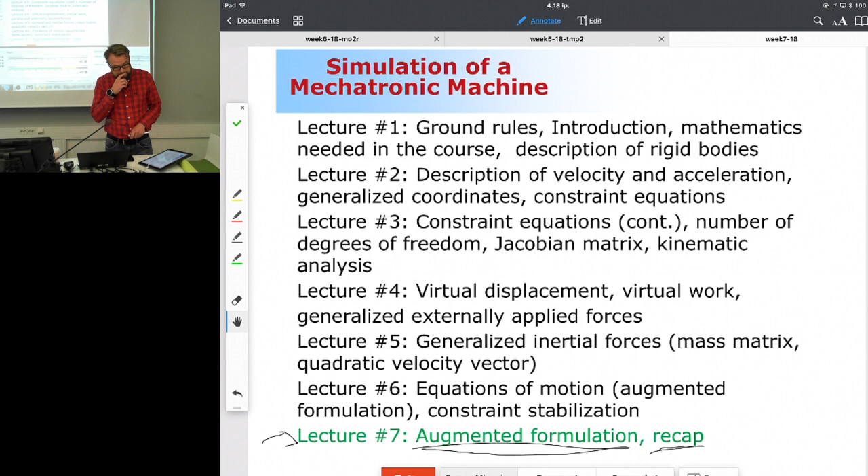Just shortly, it's going to be an online exam, but how is it that you can do the exam? I will get back to that a little later today. So augmented formulation, that's the first part of today's lecture, and what comes after that is summary. But now, before that, let's summarize what we discussed last week.

Remember, last week was the most painful week so far in your life. What we discussed was very theoretical, very hard to get a grip on, like what exactly is this concept of virtual work, and how you can apply that to inertial forces. Even more complicated, we discussed the augmented method, augmented formulation based on Lagrange multipliers. We concluded that it's part of the optimization problem, and this comes from pure mathematics. Today we will get back to that.

I want to have a good physical interpretation of the different components we need in an equation of motion. That's going to be something very, very important because I will ask something related to that in the exam. So what is the physical interpretation of, for example, the Lagrange multiplier? Based on today's lecture, you should be able to explain that to me.

Last week we looked at the generalized inertial forces. Generalized inertial forces, as the title implies, are the forces that are expressed using generalized coordinates, all right? Now if you look at the conventional way to express the inertial forces, it is mass multiplied by acceleration.

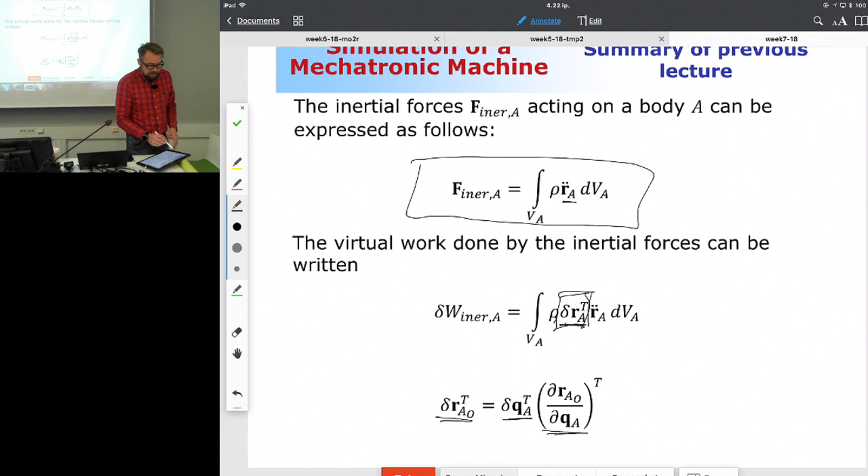Now what is actually relating those two matters together is the mapping matrix, which is partial R, partial Q -- partial R of any particular particle in the body with respect to partial Q. And Q is the generalized coordinates. Now that's the concept behind it, that's the big picture.

Now what we then did, we substituted the description of acceleration into that equation, and we also substituted the mapping matrix as written here. So the mapping matrix consists of 2 rows and 3 columns -- rows associated to global coordinates, columns associated to generalized coordinates. We substituted all that into the description of generalized inertial forces, and it's a big mathematical mess.

But that's all right, because we are allowed to use symbolic math tools, and with help of symbolic math tools, we can finally express the generalized inertial forces as shown here.

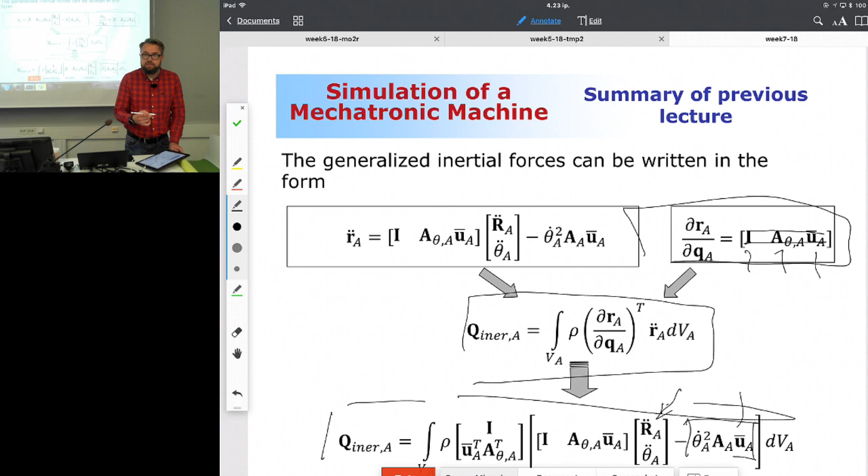What is it that we're going to have in this equation? There will be something called the mass matrix, which will be linearly related to accelerations -- this is the acceleration of generalized coordinates. Then there's another component that will be quadratically related to velocities, that's this component. So there is a mass term and then a quadratic velocity term. That's what we studied last week.

And the mass matrix in detail looks like shown here. It's a matrix that consists of 3 rows and 3 columns, because each one of the rows and columns is associated to generalized coordinates -- that's how we wanted to express our inertial forces.

How is the mass matrix structured? It consists of a submatrix located in the upper left corner -- let me go back here. So the upper left corner of the mass matrix is a 2 by 2 diagonal matrix, and when you look at the diagonal components, it's the mass of the body.

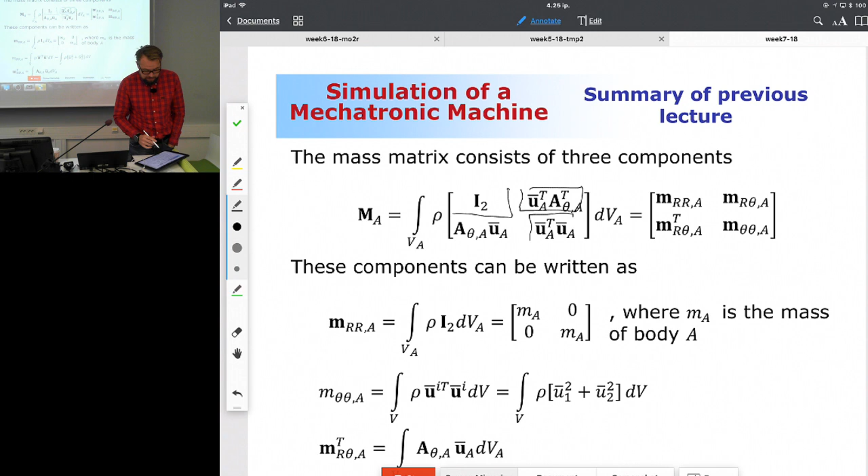Then in the lower right corner we have a scalar component that is the mass moment of inertia, associated to the generalized coordinate theta, rotation. It tells how the mass inertia resists rotational motion, and it depends on where the body reference coordinate is located. Then we have one more component that couples translation and rotation -- this is a component I don't have a clear physical interpretation for. That component will be equal to 0 if the body reference coordinate system is located at the center of mass. Okay, so that's how the mass matrix looks.

And then we looked at something that is quite difficult to understand. My recommendation regarding this is: don't get confused about the mathematical details, just simply look at the big picture here. Now let me explain you the big picture.

We concluded that when you use the concept of virtual work in such a way that the virtual work is imposed on all the generalized coordinates, when you have a constrained system, which is a multi-body system, because in the multi-body system we have constraints, you cannot set this equation equal to 0. You cannot do that because you are not accounting for the constraints. Generally speaking, there are two approaches to account for the constraints.

You can either substitute your constraint into this equation, so you can do the substitution procedure, that's one way. We are not going to look at that today. Then there's an alternative where you're adding the constraints to your original equation, and that adding will be carried out with the help of Lagrange multipliers. That's exactly what we're going to discuss today.

This equation basically says external applied forces, which is F, is equal to mass multiplied by acceleration. That's what it is. But this only holds, it's only valid for an unconstrained system. And in a multi-body system, we always have constraints.

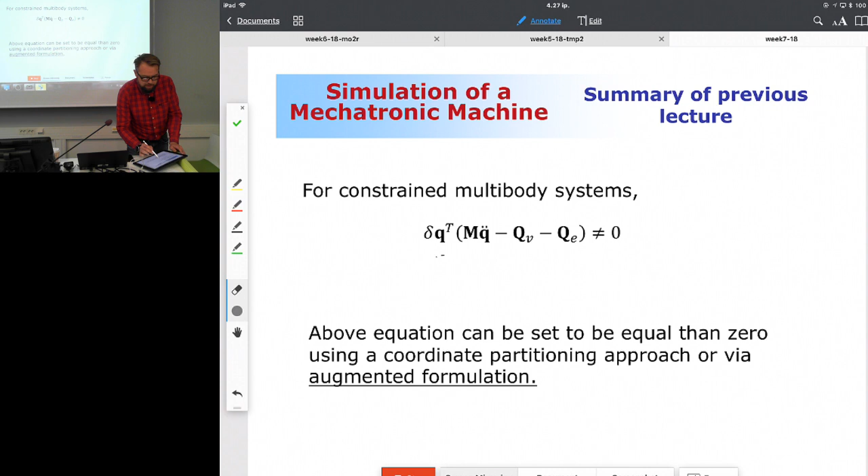Hold on, so I will erase this. So this is my original equation. And now I'm going to add something to this equation. What I'm adding is this guy here, which is a Jacobian matrix multiplied by Lagrange multipliers.

What is this? In pure mathematics, we learn that Lagrange multipliers are the price you have to pay because of the constraints. What does it mean for us, people from mechanical engineering? What are the constraints? Joints. Those are the joints. So what's the price? Reaction forces. Reaction force is due to the constraints, that's the price we have to pay.

So where are the reaction forces here? They are actually the Lagrange multipliers. Those are the reaction forces, and if you look at the magnitudes, numerical values of Lagrange multipliers, those are exactly the same as the reaction forces. When you look at the Jacobian matrix, this guy here, it tells where the forces are located in our system. So that's what it is. Jacobian matrix multiplied by Lagrange multipliers gives us the reaction forces. The numerical value for reaction forces is lambda, and we have an equal number of lambdas in our system as the number of constraint equations.

Example: we have here a pendulum. In a pendulum we have one beam-like body that is constrained to ground with the help of a revolute joint. How many constraints do we have in this system?

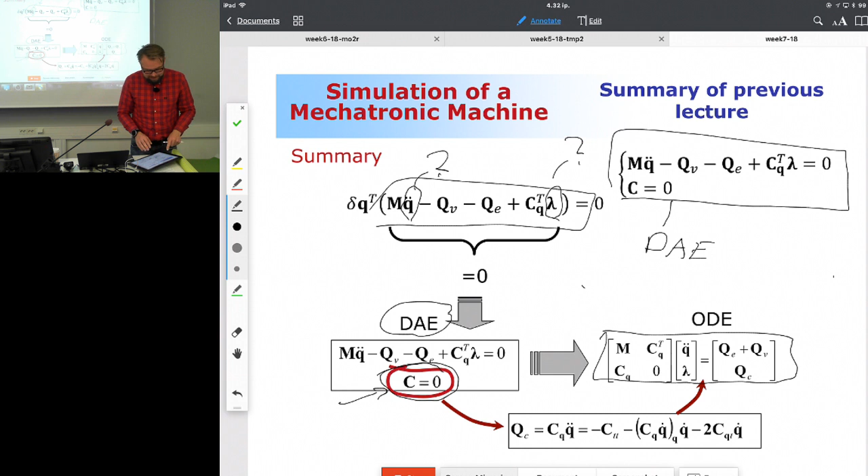How is it we can make that happen? Well, we can take this constraint equation here, and we can differentiate that twice with respect to time. Once we do that, then we have this form here. That's what we are after. So that's the equation of motion, and that we can create for any mechanical system we want. Well, at least the ones we are studying as an example, and many others can be. You can use this equation and apply it to solve the dynamic responses.

Okay, here's the big picture. I have here the mass matrix. You know what that is - that's the system mass matrix, and it depends on the number of bodies. Then I have here the Jacobian matrix, which you are already familiar with. You can get the Jacobian matrix by first making a list of constraint equations, and then differentiating the constraint equations with respect to generalized coordinates. Then I have here the Jacobian matrix with the transpose operation. No surprises here - zero matrix just to match the dimension.

Then I have here a vector of unknowns. Listen to me - this is a vector of unknowns. That's what we're going to solve. So what is it we solve? We're solving first the acceleration and the Lagrange multipliers that are reaction forces.

Here we can integrate the velocity of generalized coordinates with help of an integration procedure. From here we can integrate position, and then we're done. And then we can increase the time, and we can redo the whole thing. That's what the dynamic solution, or integrating this forward in time, that's what it is.

Okay, let me emphasize the unknowns. Unknowns are the Lagrange multipliers, this guy, and the generalized coordinates. Unknowns are generalized coordinates and Lagrange multipliers. You got it? Unknowns in this case are this vector, which is generalized coordinates and Lagrange multipliers. Okay, clear. All right, then I have here the vector of externally applied forces, the quadratic velocity vector, which may be equal to zero depending on where you put your body reference coordinate system, and then the one that comes when you differentiate your constraint equation twice with respect to time.

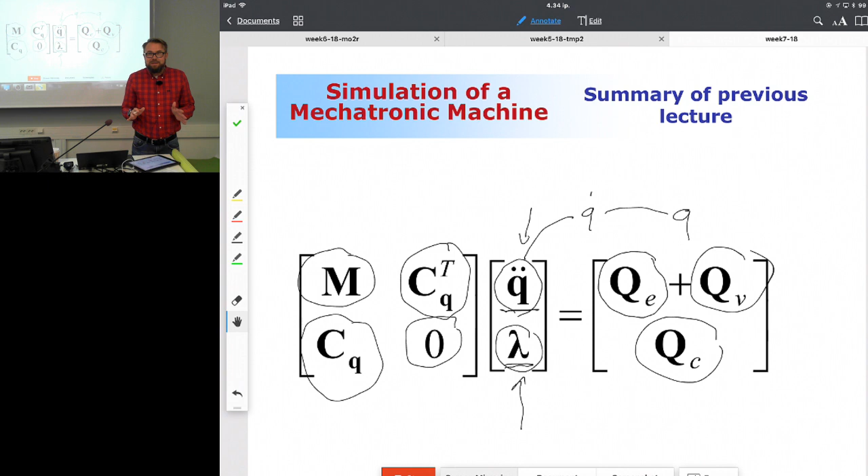Ready for in-class quiz? Yeah. Any guesses what it is I'm going to ask? In augmented formulation, unknowns are...

Here it is. Here's my first example. I will get back to this in-class quiz and the solutions soon, but first I would like to explain my first example to you. So in my first example, I have a planar system, and I must admit that the drawing is a little bit confusing. But what I would like to show here is that there is one moving body only, and the one moving body is this beam-like body, this one here. That's my moving body.

The moving body is constrained to ground in two different locations. So it's constrained to ground at point P, located here, with help of a primitive joint. This primitive joint constrains the motion in the global x direction, and this is a motion that is not possible - that's the motion that is constrained. So it's a primitive joint. Maybe better to change the color. So this red arrow shows that it's not allowed to move in that direction.

Then there's another primitive joint located at position Q, this position here. And in this one, the motion in the global y direction is constrained. So that's the constraint. So those are the two constraints.

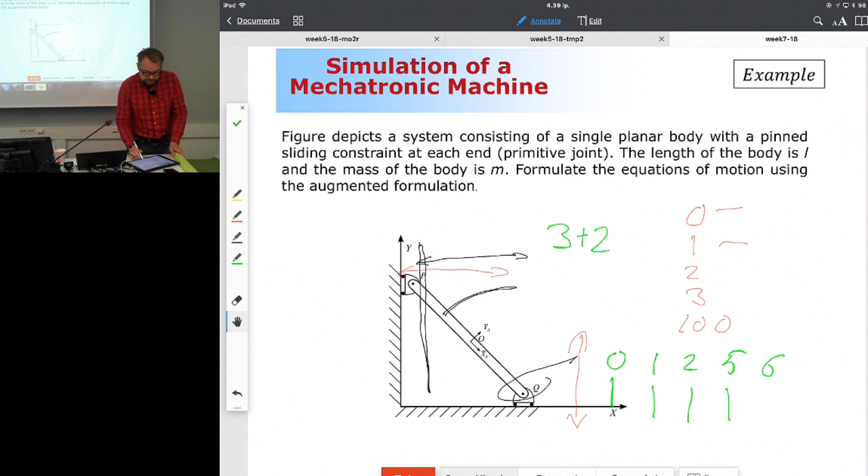Okay, let's solve the whole thing. So let's make it happen. We're going to follow certain steps, and once following those steps, we can get the equation of motion automatically.

The worst mistake you can do in multi-body dynamics is thinking. Absolutely no thinking. Thinking is not allowed here. You're just following certain steps. Always the certain steps, and always, always, always you must follow this equation. No shortcuts. Shortcut is a criminal action. Not allowed. You're just following the steps and you get out everything automatically.

Okay, so let's follow the steps. Step number 1, mass matrix. We could do it in a hard way as shown here, and the hard way is that we will use this volume integral to define the components needed in the mass matrix.

The first component is a 2x2 matrix where there is a mass of the body. No need to do any volume integrals, it's simply a mass of the body. Then the second one, which is a mass moment of inertia. So if I assume that this is a beam-like body, a thin body, I can assume that this body's y direction is equal to 0.

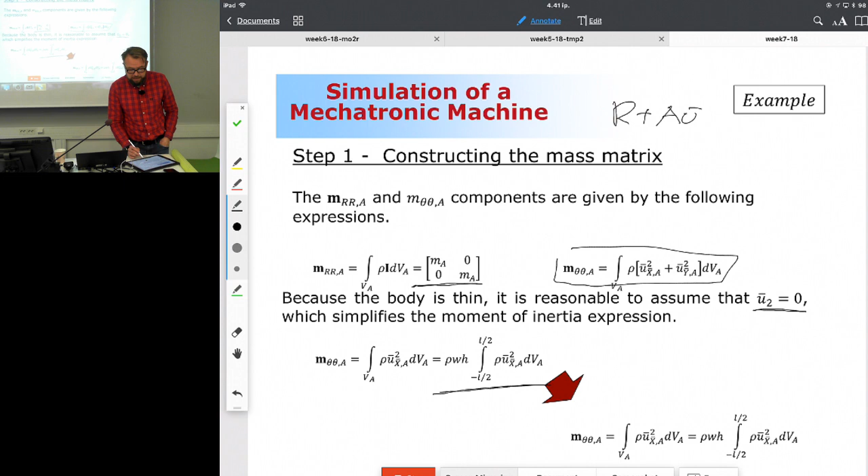Then I can express it such that I simply integrate u bar x to the power of 2, and I'm going to integrate that in the x direction. So that's basically the mathematical operation I need to carry out. But again, just use the mathematical tools. Once I do this computation, I will get mass times length squared divided by 12. This is what we got last week too.

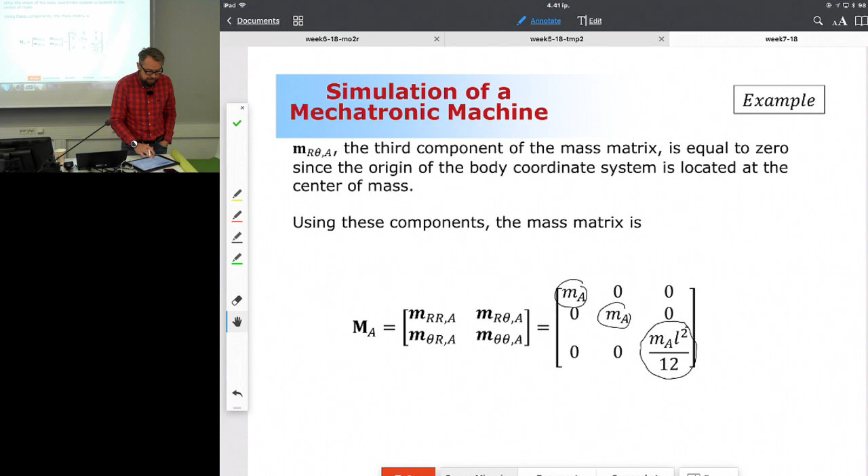So, I'm going to get the diagonal representation of the mass matrix. Why is that? Simply because if I look at this picture again, look at where the body reference coordinate system is located. Based on this location, I could tell that the mass matrix will be a diagonal mass matrix. Okay, step number 1, done.

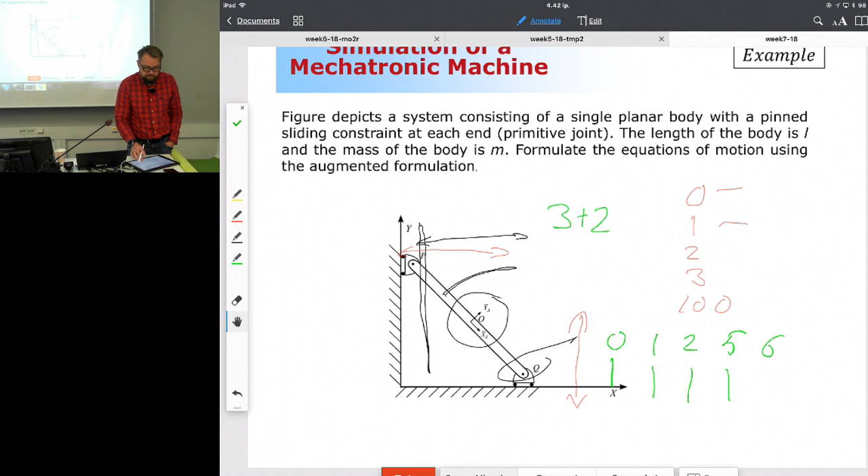Step number 2, Jacobian matrix. What are the ingredients we need in the Jacobian matrix? We need constraints, and we need generalized coordinates. So the constraints are associated to 2 points, point P, which is here, and point Q, which is here.

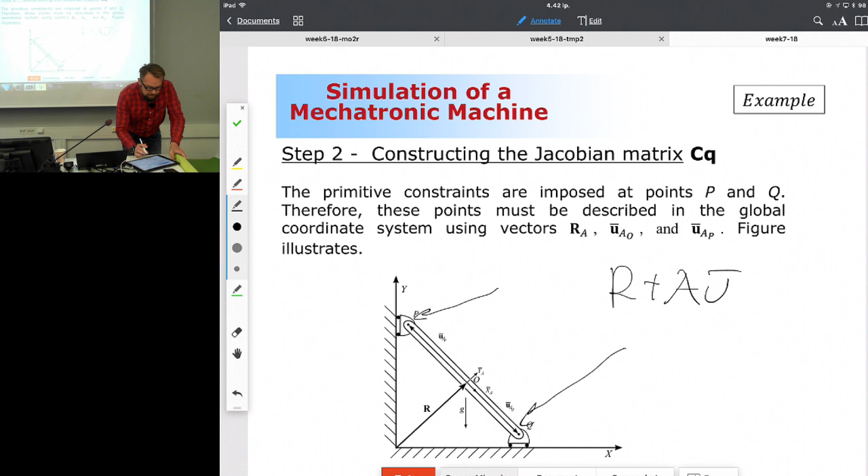Let's express these locations with help of this equation that we are quite familiar with, and then once we have this equation, we're ready to impose the constraints. Okay, clear? So let me see what is the first point. First point is P, the one that is located here. So this is P point.

First, we have to travel from the origin of the global coordinate system to the body reference coordinate system. That will be carried out by vector R, which consists of 2 components that are unknowns. I don't know what they are. Then I have to account for the orientation of the body reference coordinate system. Orientation is an unknown, I don't know what the angle theta is, but I will solve it.

And then I'm going to use the vector u bar to travel from here to my final destination point P. The vector u bar, when you look closely, the x is pointing this direction, so I must travel minus L divided by 2 in the x direction, and y direction is going to be 0.

And then I'm ready to impose the constraint associated to this component, because the motion in the global x direction is not allowed. That must be equal to 0 all the time. So here's my first constraint. You following me? Yes? Everyone? Okay, good, so we're on the same page.

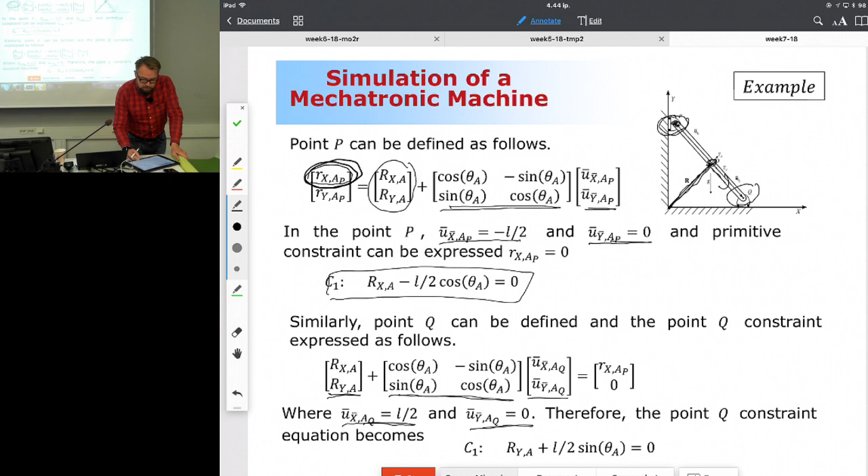Okay, then we're going to move on to point Q. Exactly the same business, but now we're going to first move the body reference coordinate system to account for the orientation. Now the vector u bar will be different because we're in the other end of the beam-like body. Vector u bar is going to be L divided by 2 because we have to travel in the positive direction, and y will be equal to 0 as in the previous case. Now we're ready to impose the constraint. This time the constraint will be associated to the y direction. That's it, I got the second constraint as shown here.

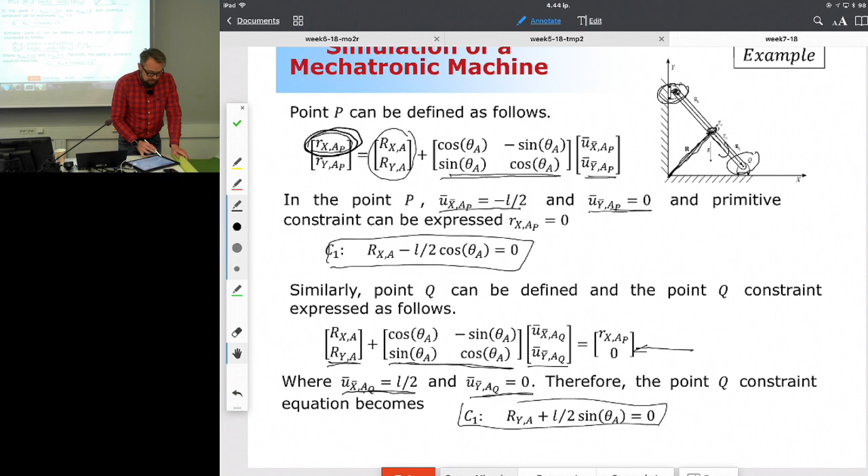Then I have the ingredients I needed to compute the Jacobian matrix. So the list of generalized coordinates is Rx, Ry, and angle theta. And then it's just mechanical mathematics.

I will take the constraint equations one at a time, and I will differentiate those with respect to the generalized coordinates. That's going to give me the Jacobian matrix. The Jacobian matrix consists of 2 rows, 3 columns. Columns are associated to generalized coordinates, rows are associated to constraints. Clear?

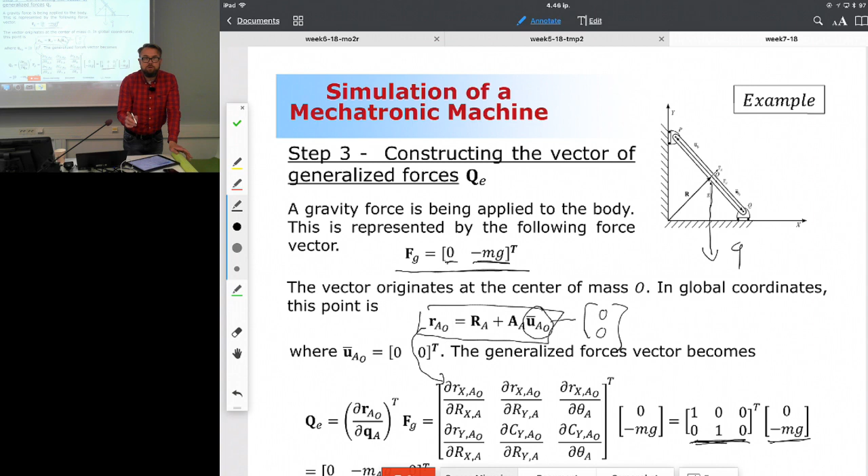So my mapping matrix turns out to be the one shown here. I'm basically taking this position and differentiating it with respect to my generalized coordinates, and then I get the mapping matrix. Mapping matrix multiplied by forces in global coordinates gives me the generalized forces. Here's the final solution: it consists of 3 components - 0, mass multiplied by gravity constant in the minus direction, and 0. Okay, step number 3, done.

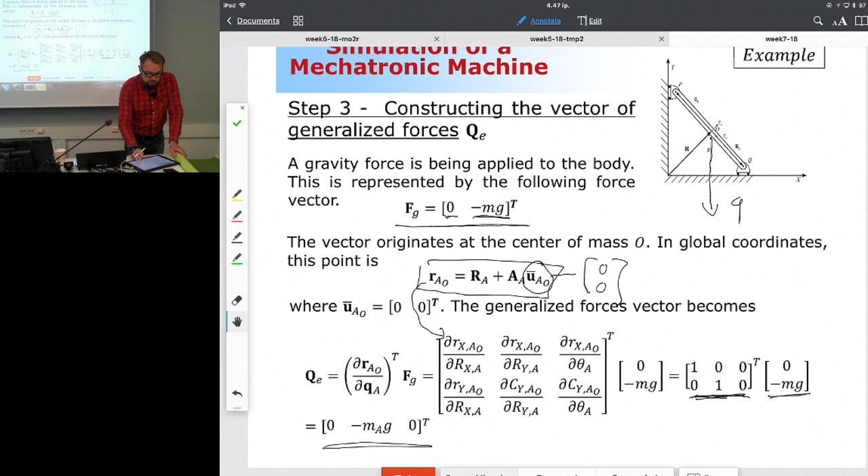Quadratic velocity vector - I'm not even going to compute that, because I can see from the mass matrix, which was a diagonal matrix, that this will be equal to 0. Step number 4, checked, so tick the box.

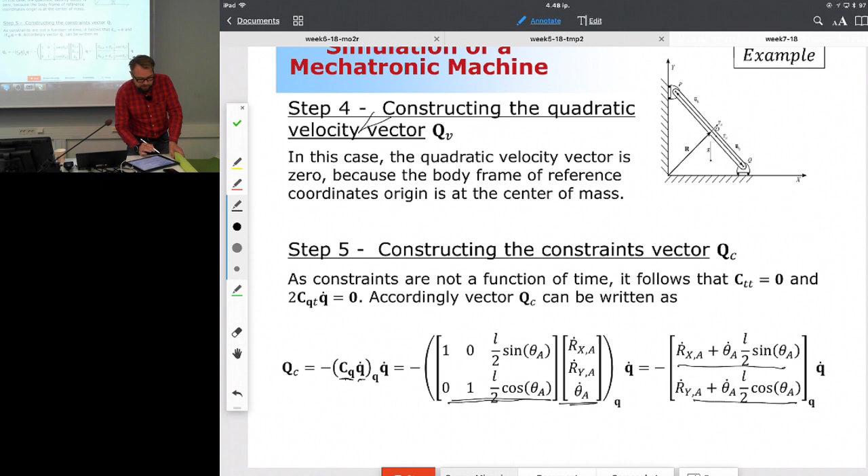Checked. Step number 5, QC, which is what I get when I differentiate the constraint twice with respect to time. This is a little painful because it's the same thing we looked at when we computed the kinematics. So first here's the Jacobian matrix multiplied by the velocity of generalized coordinates. Here's my Jacobian matrix, here's my velocity. That gives me a vector of 2 components, this and this. Those components will be differentiated with respect to generalized coordinates, which gives me a matrix - and the matrix, where is it?

This is my matrix now, so I copy-paste quite a bit of material from the previous page. So this is my matrix, and then this is finally multiplied by the velocity of generalized coordinates. No thinking needed. It sounds a little cumbersome and difficult, but it's very straightforward. Okay, step number 5, done.

Step number 6, this.

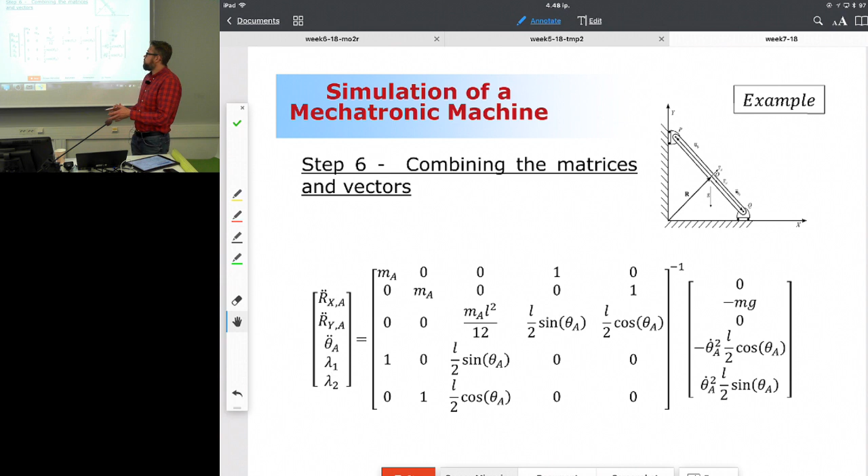Constructing the system matrix. This is my system matrix. When you look at this closely, I have here the mass matrix of the system. So a system consists of one body, so it's just one mass matrix. Then I have my Jacobian matrix here, and the transpose of the Jacobian matrix is here. And all these will be inverted.

That's fine because I have computers that can do the inverting for me. Then I have this 2 by 2 zero matrix here. Here's my externally applied forces plus quadratic velocity vector, which was equal to 0. And then the QC component is here. That's it. My unknowns are listed here: the acceleration of generalized coordinates and Lagrange multipliers. So I'm solving not just the response, but the reaction forces too.

Okay, let's make it happen. So, are you ready to solve this in MATLAB?

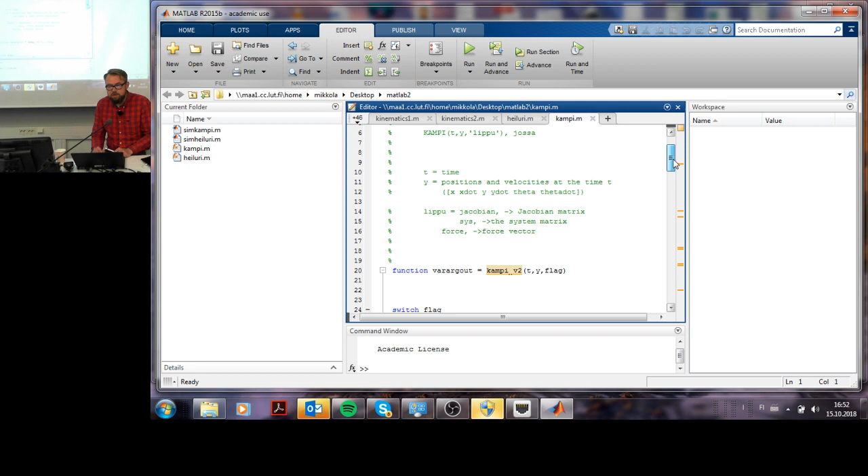Okay, so here it is. So I have a few variables: time, and then the vector that tells how my positions and velocities are - x dot, y dot, theta dot. So those are the generalized coordinates and their velocities. And then a little bit about how my integration is described. If I look at this, this is the one where most of the material can be found, in this code or this file here.

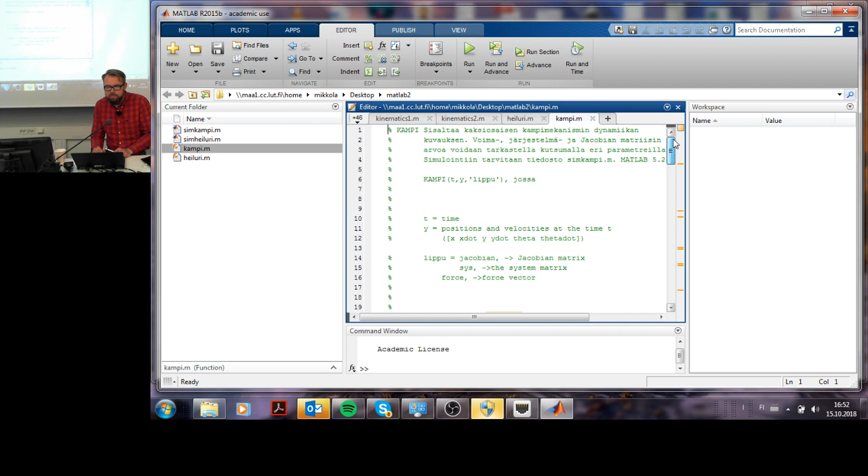Where is it now? Let me see. So here's my unknowns, here's my Jacobian matrix. I'm using the vector y to express my unknowns, shown here. And this is my forces here. My system matrix is this one here. Everything there, we can look at the details a little later. But this is it.

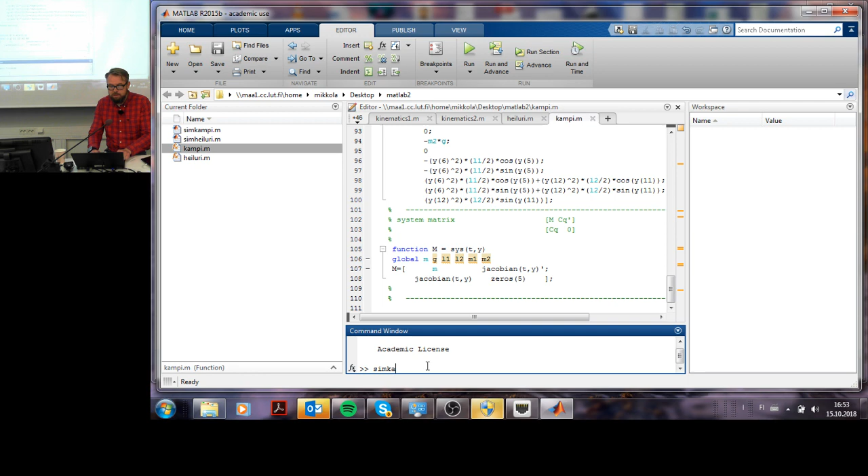Oh no, let's see, you ready? Hold your breath. Okay, ready? Oh wrong, this is not the right kind of model. I need to go back, this is way too complicated for us.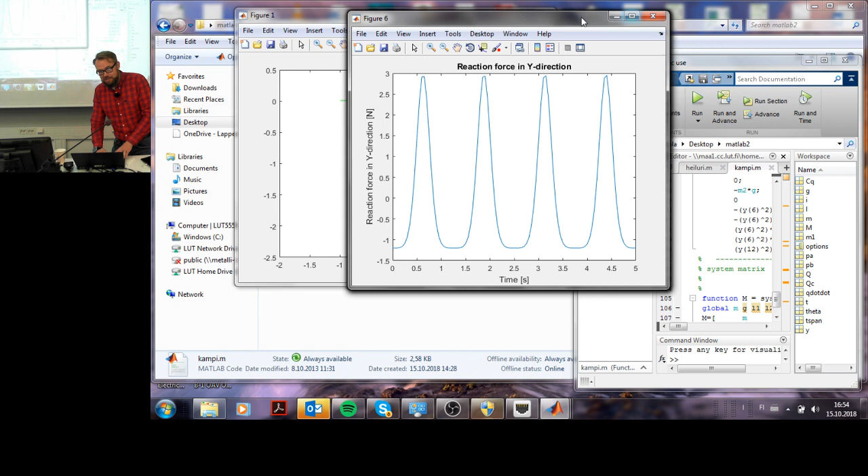So great stuff. So here are the coordinates when I'm solving them, but the response, you saw that.

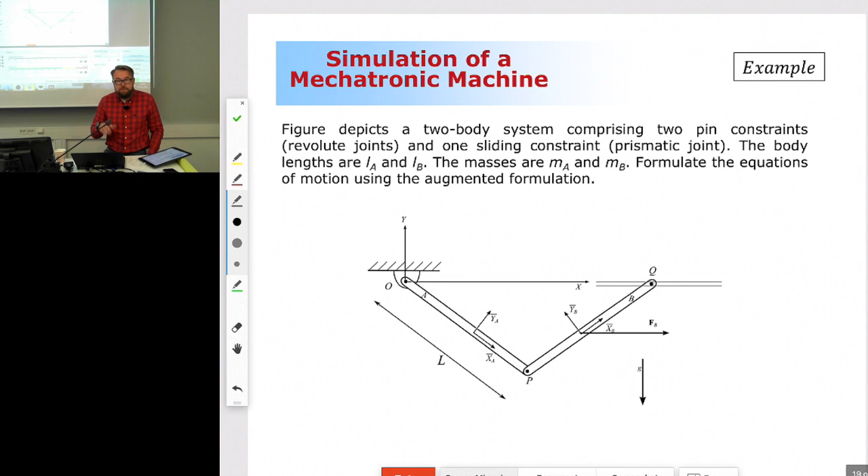We have a deal. Okay, my next problem is this one. So it's not just one moving body, but two. Let's raise the level of difficulty. So now we have two bodies. How is this going to be different comparing to the previous example? No difference. And that's the beauty of multi-body system dynamics. We're going to simply follow again these 6 steps.

We're going to follow the 6 steps and get the equation of motion automatically. Nothing we need to think about, it's very mechanical work. First we express the mass matrix, then the constraints Jacobian matrix. That's how it goes, so there will be no surprises. This is just an extension to 2 bodies. If you extend this to 100 bodies, it will be all the same again, no changes. I have here a system that consists of 2 moving bodies.

So what's going to be the number of generalized coordinates? 6. Okay, 6 generalized coordinates. What's going to be the number of degrees of freedom? 1, because of this equation. Okay, what's going to be the number of unknowns?

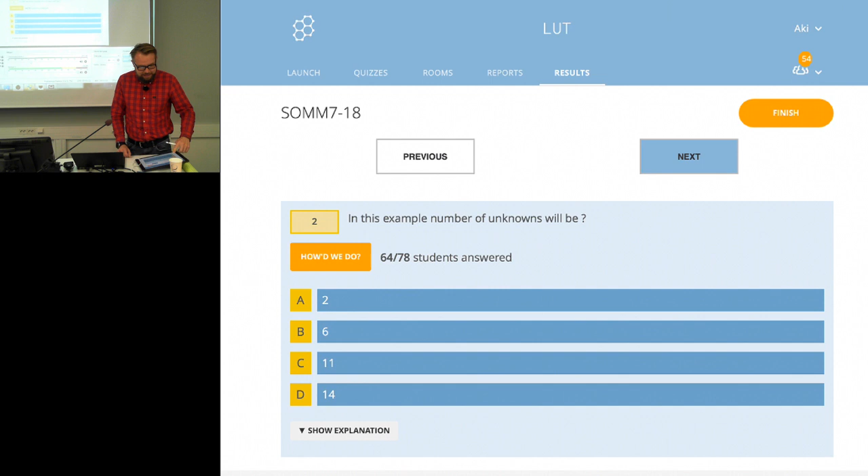Okay, but now we have 64 students, and the correct answer is 11. Okay, still, if you round it up, it's 100%. So where is the 11 coming from? Where is this coming from? 6 plus 5.

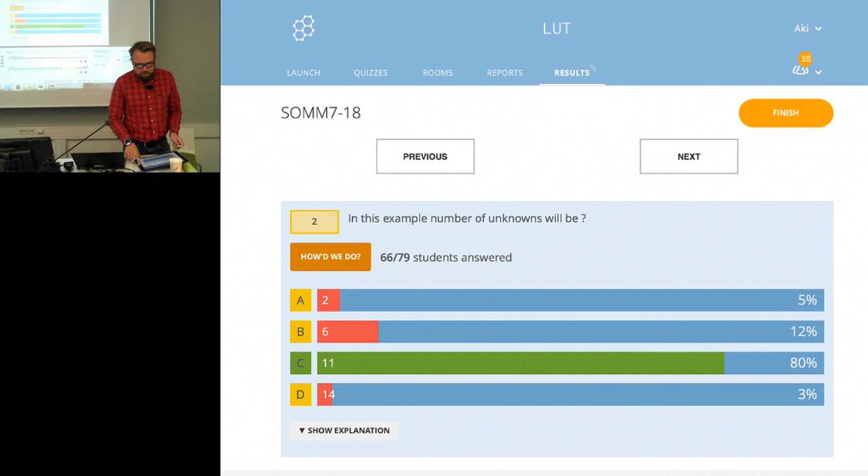6 plus 5, because if we go back to this one here, remember what I have here. These are the numbers you need in order to compute the degrees of freedom. But you can use these numbers for another purpose too, to calculate the number of unknowns by this operation: plus 6 plus 5, 11. That's how it goes, so that's the number I'm looking for here.

What are these 11? Yeah, so they are generalized coordinates, 6 generalized coordinates plus reaction forces. Reaction forces are the ones located here and here, and then here too, so here's one. So there is a total of 5 reaction forces because of the 5 constraint equations.

Okay, with that, I guess we're ready to move on and follow the 6 steps to create the equation of motion. At this time I'm not going to show off with any mathematical details, but instead I'm going to simply use pre-calculated tables, and this, by the way, is my recommendation. So if you need to compute the mass matrix for a system like this, I don't think it makes much sense to use volume integrals.

Instead, take the pre-calculated engineering tables. A lot of these tables are available, and with the help of these tables, you can compute the mass moment of inertia and other features. Here we're mainly looking for mass moment of inertia, because in our diagonal representation, we're going to have just the mass of the bodies and then the mass moment of inertia.

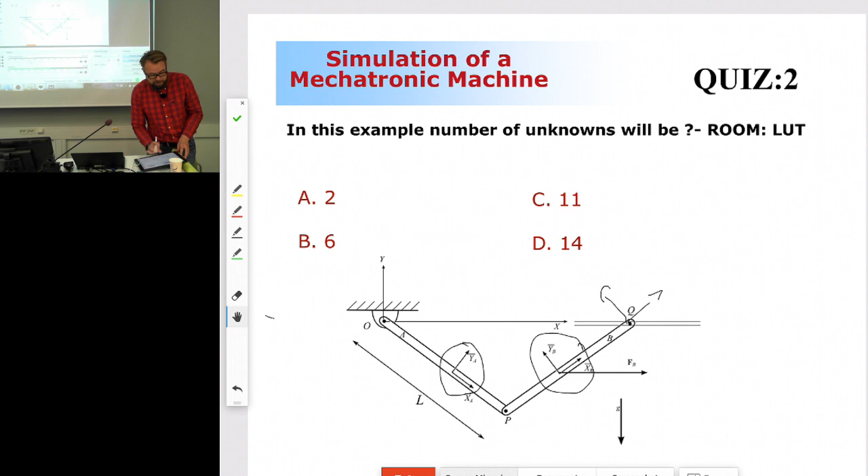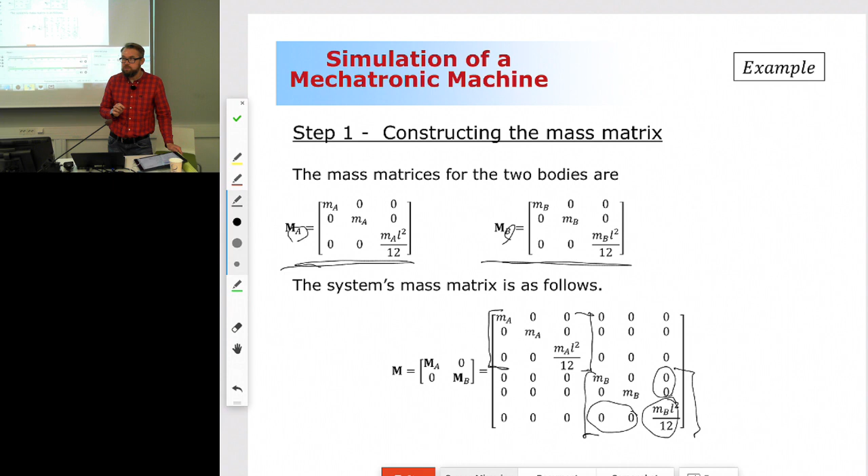What if I would change the position of this second body reference coordinate system to be, say, here, at one end of the system? Why not? I could make it happen. But in that particular scenario, these two components would not be equal to 0, and it would also affect this term here. So those will be the changes because of modifying the position of the body reference coordinate system.

That's step number 1, done. Step number 2, Jacobian matrix. Ingredients again - we need constraint equations and we need generalized coordinates.

First constraint equation is associated to point O, which is this one here. Now here we have a temptation - we have the global coordinate system, and this is exactly where the constraint is imposed, at the origin of the global coordinate system. Can we make a shortcut, not to use this equation but instead jump directly to this location? No, absolutely no, not allowed.

We always have to follow this equation, meaning we first travel here with help of R. We account for the orientation of the body reference coordinate system with help of the rotation matrix, and then we come back to where we started with help of vector U bar. That's the procedure we always follow. So that's the translation. Vector U bar will be minus L divided by 2, 0, because the x-axis is pointing this direction. This gives, and then this will be equal to 0, because this point here with respect to the global coordinate system is at the origin. So that's where I get two constraint equations, C1 and C2.

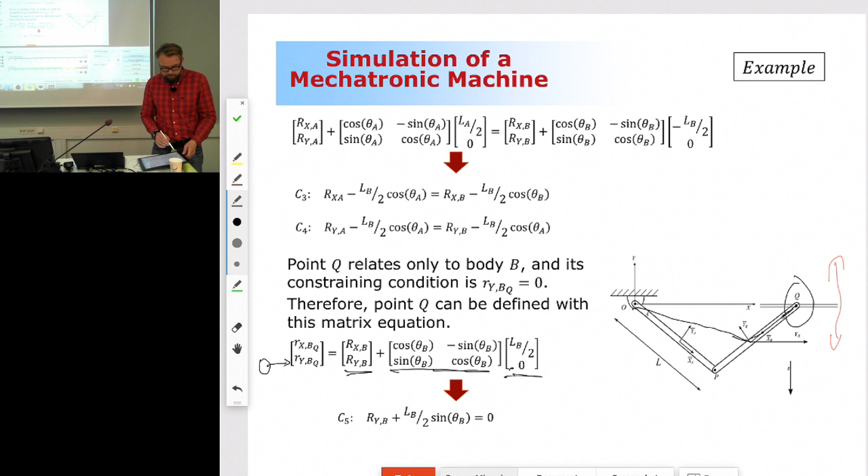Okay, one more step before we are ready to express the Jacobian matrix. We have to make a list of generalized coordinates. Let me point it out: this is my first generalized coordinate, my second, my third, my fourth, my fifth, my sixth.

Those are the generalized coordinates. I'm going to simply differentiate these 5 constraint equations with respect to the generalized coordinates. I will get a matrix that consists of 5 rows because of the 5 constraint equations, and 6 columns because of the 6 generalized coordinates.

Very easy. Then vector of external applied forces. In this case I only have gravity force applying, and it's applying to both bodies, so it's going to be applying at the center of mass. Because the body reference coordinate systems are located at the center of mass, this will be somewhat straightforward.

This is the position where the force is applying with respect to body A. The vector U bar will be 0, 0 - it only gives this component when I look at the position. When I differentiate that with respect to generalized coordinates, my mapping matrix will be the one shown here. When I compute the mapping multiplied by the original force, which is 0, minus mass multiplied by gravity constant, this is the force associated with body A.

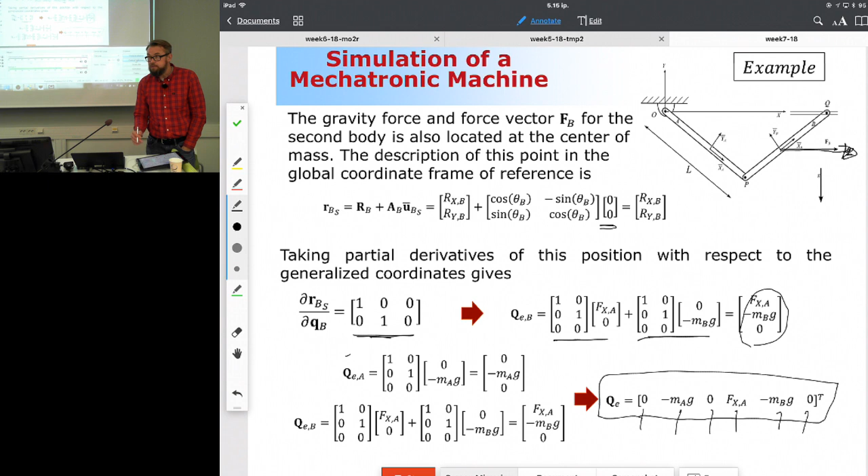This is associated with the point force, and this is associated with gravity. So the generalized force associated with body B is the one shown here. The final vector of generalized forces is the one shown here. It consists of 6 components because of the 6 generalized coordinates: Rx for the first body, Ry for the first body, theta for the first body, Rx for the second body, Ry for the second body, theta for the second body.

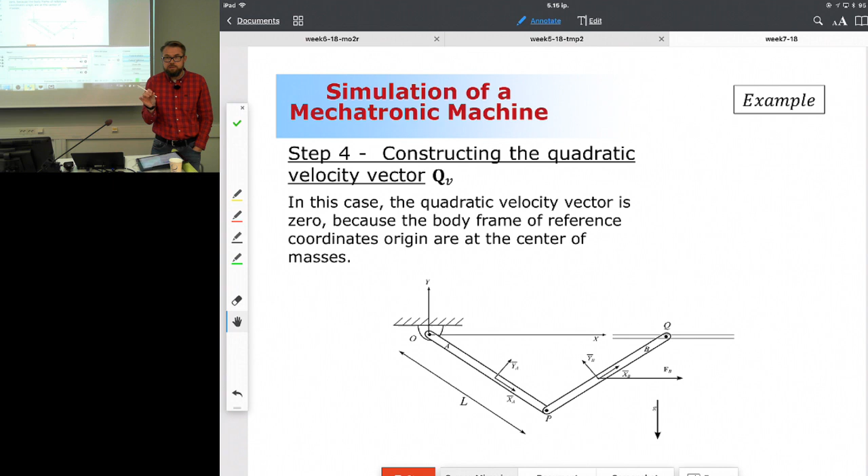Quadratic velocity vector - that will be equal to 0 because we have a diagonal representation of the mass matrices, so no need to worry about that.

Step number 5, the painful one, really the ugly one. Let's make it happen. This is the part we have to compute: here's our Jacobian matrix multiplied by velocity, that is then differentiated with respect to generalized coordinates, and finally that is multiplied by velocities again. Here's my Jacobian matrix - I'm going to multiply that with velocities. This is what I'm going to get.

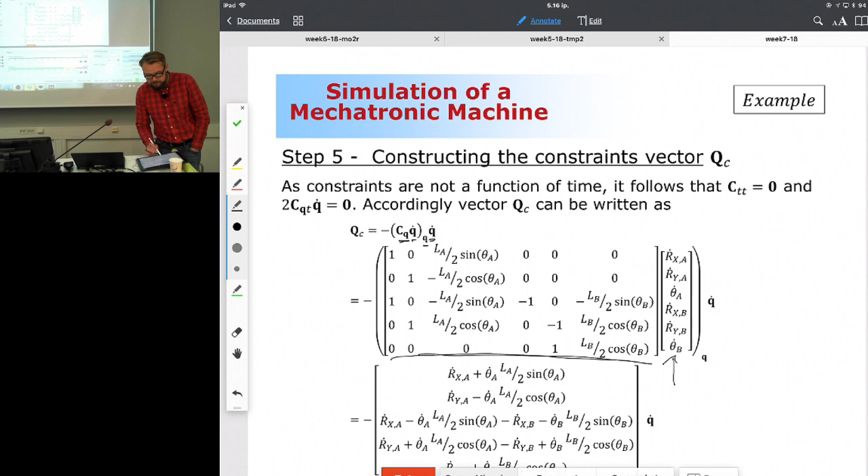It's a vector that consists of 5 components, as shown here, that I will then differentiate with respect to generalized coordinates. I will get the matrix as shown here, and that will be finally multiplied by velocities, and the final solution is a vector of 5 components.

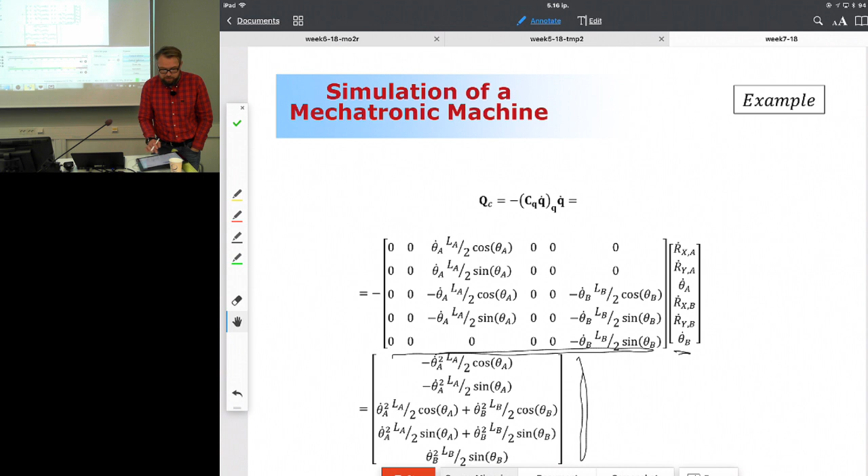The system matrix - I'm not even constructing that, but I can construct it using MATLAB. Should we run the MATLAB example? You saw the MATLAB example again - it's the one where this crankshaft mechanism is moving left and right. Let me show that to you.

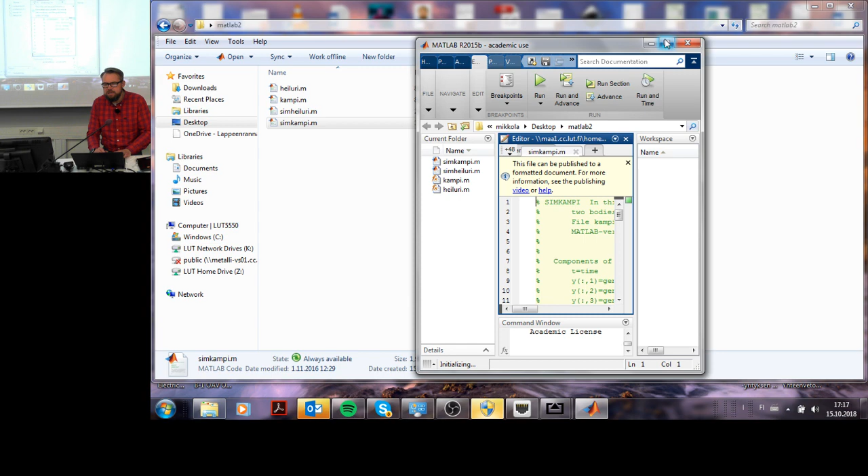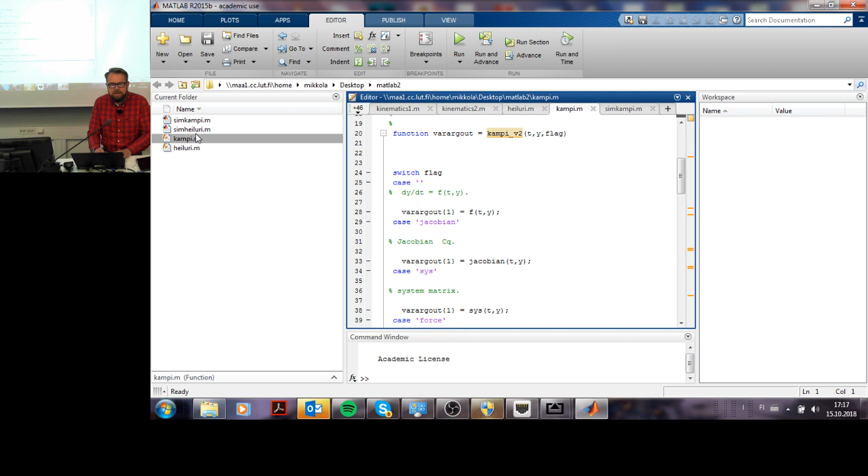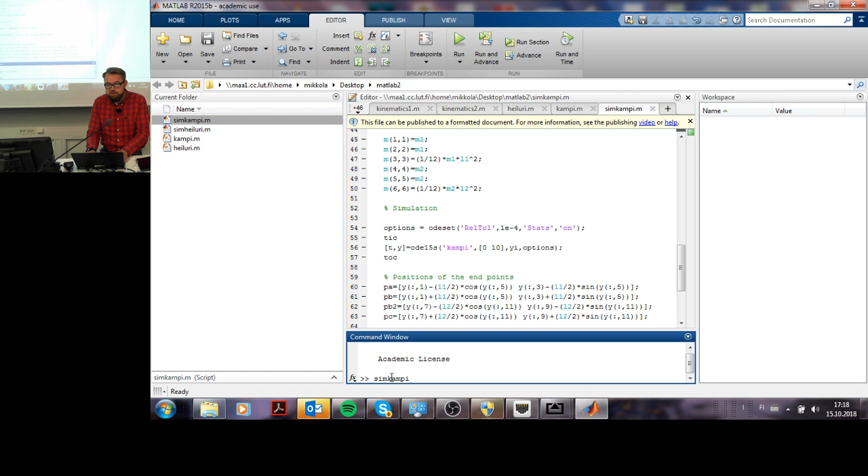So these are my coordinates here. I don't want to show that, but this one here - so these are my coordinates. This file will be available in the Moodle database, so with the help of the Moodle database you can take a look at how the code is. It's not professional code or anything, but let's just solve the response.

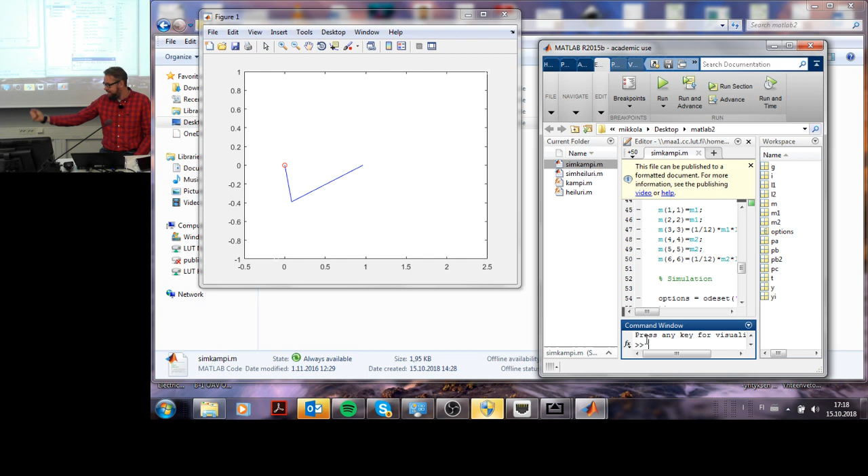Yes. Can you believe it? Can you even believe this? Magic, I guess that is magic. Oh yeah, it's like... Okay, now very good, so that's the second example.

Now I need to go back to OBS and change my settings again. Okay, so we're back here. By the way, look how awesome the technical stuff is today. Everything works like a dream, so the only thing missing is this 100% success rate. Okay.

Recap. So we're ready to move on to summary. These are the items you must know when you get into the exam.

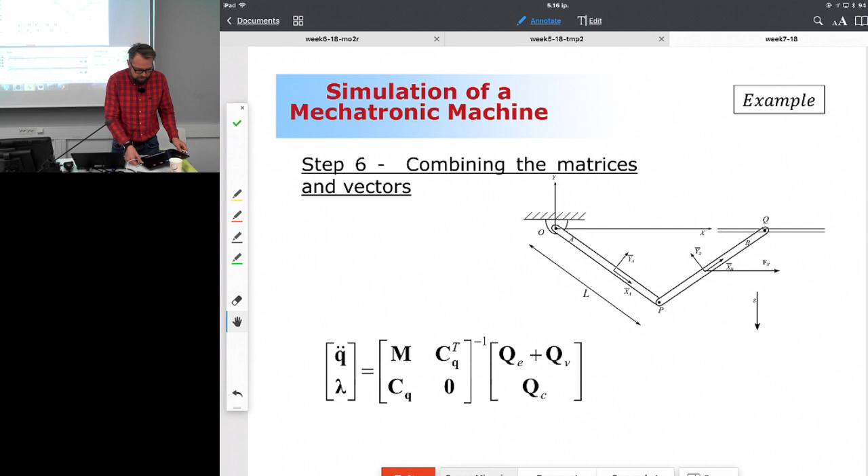So you cannot see that. Why not? Oh, because this window has a delay. Hold on, so what's the window that I should show you? Let me see. Here.

Okay, so here's a list. You must know each one of these items if you want to score high in the exam. If you are in a hurry and you don't like the subject matter, that's all right too, because then I will tell you what topic you can skip.

It will be based on star ratings. Each of the topics will be identified by a number of stars, and if there are a lot of stars, make sure you know that particular topic. If there's, say, 2 stars or 1 star, skip it. But if you really want to score high, you must know each one of these topics, plus you must read the lecture note.

So there may be a question from the lecture note, but nowhere else. I want to play fair. Everything that I have explained here, plus the lecture note - if you cover that, you will get... and if you really know the topic, you're gonna get 5, no more. And if you're in a hurry, just pick the few items from the list, the ones rated by a high number of stars.

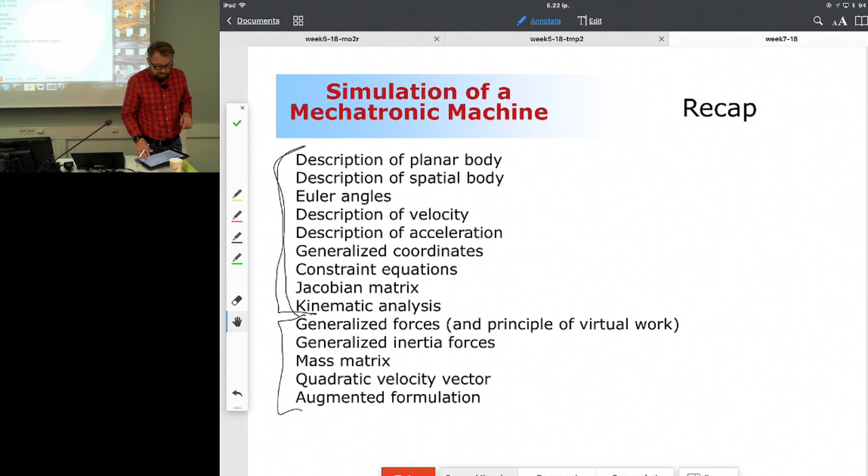Okay, would you like to see the ratings? Okay, why not. Description of planar body: 4 stars. What is this? Important, you must know that. Okay, I really hope that you got an idea about this already.

So what we're going to do to describe the planar body is use this equation - this equation describes every single particle in the system. And the body consists of an infinite number of particles. That's how it goes.

So what do we have in this equation? We have the translation of the body reference coordinate system, the rotation of the body reference coordinate system, and the vector u bar, which is constant. It takes into account every single particle within the boundaries of the body.

Now the interesting component is the 2x2 rotation matrix. The rotation matrix is mathematically orthogonal. What does that mean? It means that if you form vectors from the columns of this matrix, those vectors will be perpendicular with respect to each other. In our case, because we're dealing with 2-dimensional space, it's the coordinate axes that will be perpendicular with respect to each other. They will also be unit in length, which is an extra feature.

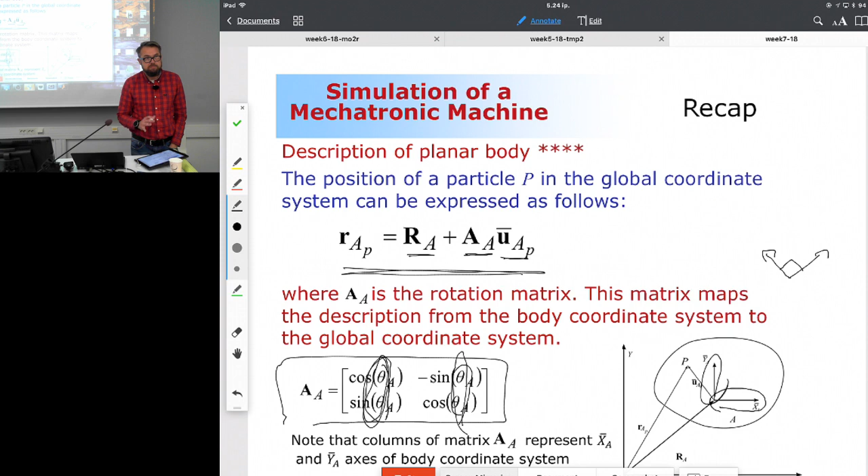So if you look at what this vector here is, it's going to be the representation of the body x-axis. And this one here will be the representation of the body y-axis. That's what it is. So it's an orthogonal matrix - that's good to keep in mind.

Description of spatial body, 3-dimensional body. 3 stars, medium important, medium. So quite important, but not really the most essence of this course.

Exactly same concept as in the case of a 2-dimensional system, except the dimensions will be different. So we're going to have here a vector that consists of 3 components, because we have 3 axes: x, y, and z axis. That's why the 3 components. Then we have here the rotation matrix.

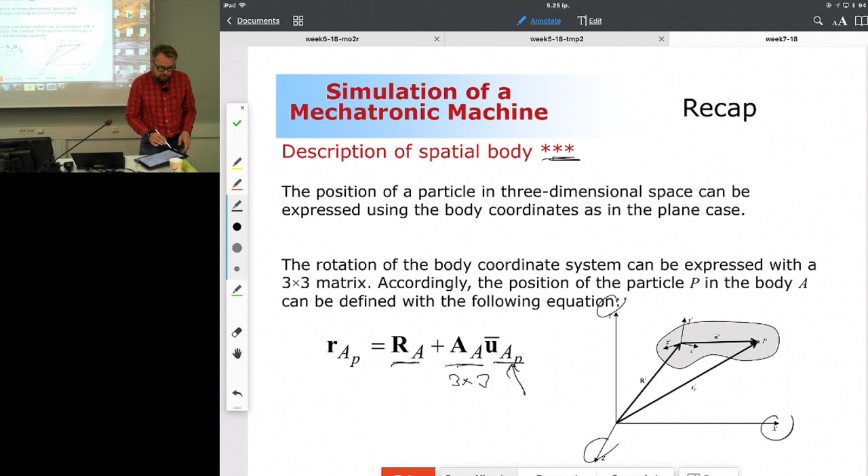Rotation matrix can be described many different ways, but we only learn the one here in this course, and that's based on Euler angles, which will be explained next. This matrix will be a 3x3 matrix, which typically has, in our case, 3 unknowns, which are the Euler angles. Those are the unknowns. Then I have here vector u-bar, which consists of 3 components, because the body reference coordinate system has 3 axes. 3 stars, so medium importance.

Euler angles - what's the concept of Euler angles? You must remember that it's based on successive rotations. Successive is the key word here. It's based on 3 successive rotations. First there's a rotation, and after that the once-rotated coordinate system will be rotated a second time, and then the twice-rotated coordinate system will be rotated a third time. That's the idea behind it.

And it's based on 3 rotations: phi, theta, and psi. Okay, so those are the 3 successive rotations.

The order of rotation we have discussed here is z, x, z. You may consider, okay, why make your life miserable by using this sequence? Why not x, y, z? It could be possible, but this is the most frequently used sequence, and I guess this is because it comes from the gyro, and you can put a gyro to any orientation in space.

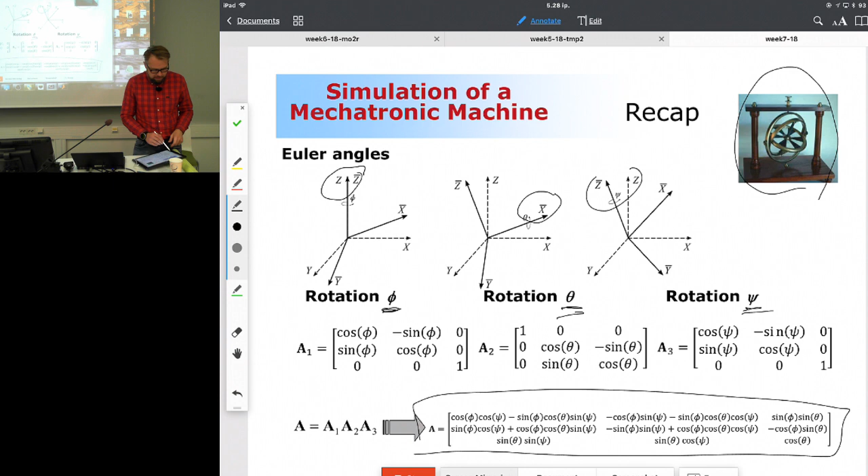Here's the concept: successive rotations. Description of velocity, 2 stars. Skip it if you're in a hurry.

What is it we have here? So we get this when we differentiate the position once with respect to time. We got here translational velocity and angular velocity. This one here is a rotation matrix that is differentiated with respect to angle theta, and it will be rotated 90 degrees in the positive direction. That's what it is. What is its physical interpretation?

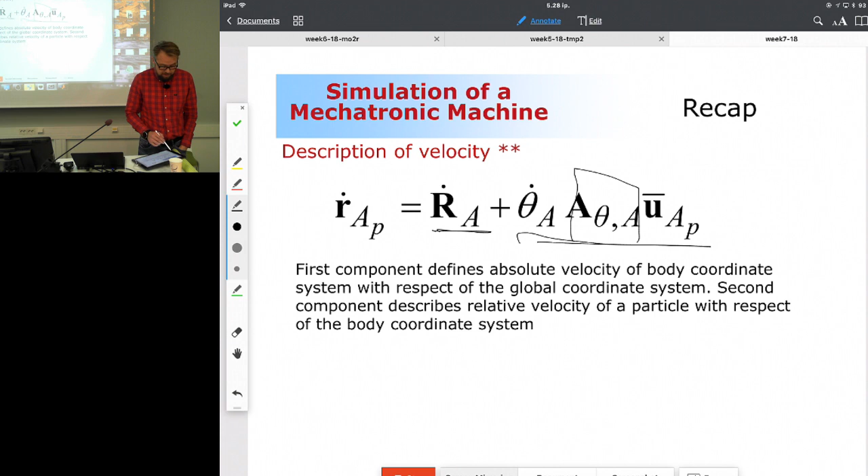Not that important a topic, quite simple though. Description of acceleration, 2 stars. Skip it if you're in a hurry. This one consists of 3 components: there's a translational acceleration component, normal acceleration component, and then the tangential acceleration component.

Now, I could ask, how is Coriolis acceleration in multibody dynamics? What's the Coriolis acceleration in multibody dynamics when we're dealing with rigid bodies? Non-existent. We don't have such a thing, because we are not accounting for the rotation of Earth - we are looking just at mechanics, okay?

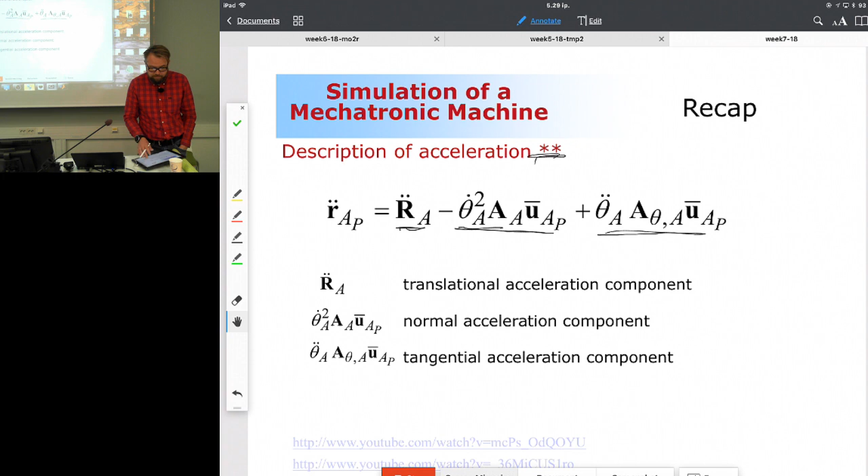Generalized coordinates. This is kind of a hot topic, rated as 4 stars. You must understand this. It goes back to this equation where we're describing the particles. This was the original, where we got started. Now, what are the variables in this equation?

Those variables will be called generalized coordinates. Later, we want to use these variables to express all the forces, and we also want to use these variables to solve the kinematics. So these variables are essence. Very, very important to understand.

So what are the variables then? If you have one body, a planar body, it will be Rx, Ry, and angle theta, nothing else. But the U bar is not a variable, because it points to the particle with respect to the body reference coordinate system. That will be constant, because the body cannot deform.

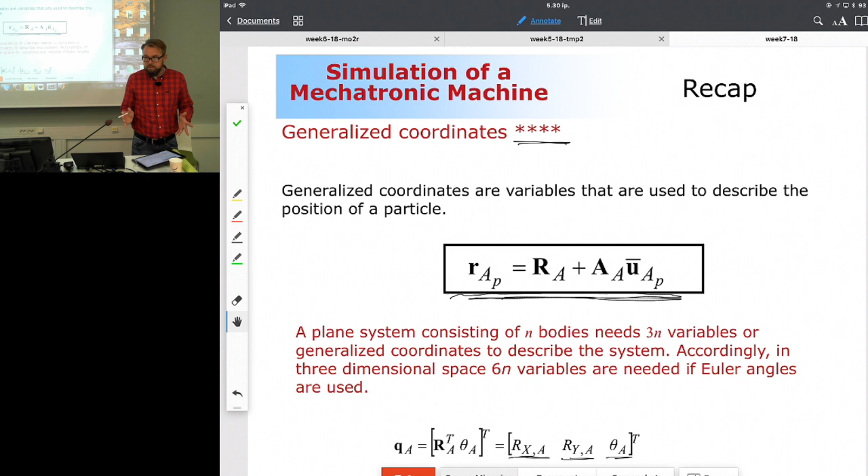Clear? Then, constraint equations, rated 4 stars. Here's my advice: please familiarize yourself with symbolic math software, and make sure that for the joints we're used to dealing with - the prismatic joint and the revolute joint - you can make the constraint equation for any kind of configuration that consists of prismatic joints and revolute joints, because there's a high possibility that I will ask something like that.

Also make sure that you can compute the number of degrees of freedom. The number of degrees of freedom will be based on the number of generalized coordinates minus the number of constraint equations.

So this is a mathematical representation of constraint equations. You can put it in a vector, and in that vector you have independent constraints that are a function of generalized coordinates and possibly time. Now if the number of degrees of freedom is 1 or more, then you have a dynamic system, and in order to solve the response of the dynamic system, you must create the equation of motion and solve it forward in time, exactly like we did earlier today.

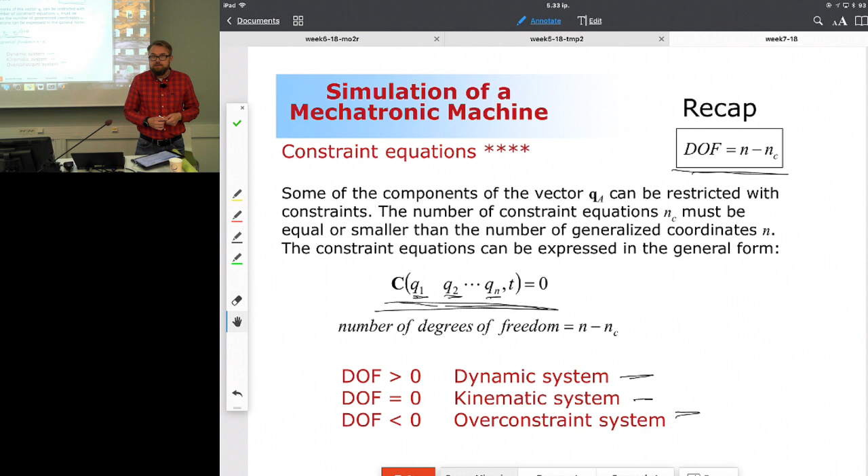Clear? Questions? Okay, then... this is serious.

So if there's one thing only that you have time to study, what's that? The Jacobian matrix. How many stars is here? 11. Whew. So it's very, very important.

Now here's a little bit of a trick, because if you look back, constraint equations were 4 stars, generalized coordinates 4 stars, but when you put them together, it's 11 stars. That's because you must understand both concepts in order to compute the Jacobian matrix. The ingredients are the constraint equation and the generalized coordinates, and then it's all about partial operations. That's it, that's how it goes.

But here's a high risk: if you answer in the exam using just pen and paper, which is all right, there's a risk that you can make a mistake in the math. When you make a mistake in the math, here comes the problem of the online exam, because if you make a mistake, it's very black and white - either you get it correctly and score full points, or you get it incorrectly and you get nothing. That is a problem of the online exam.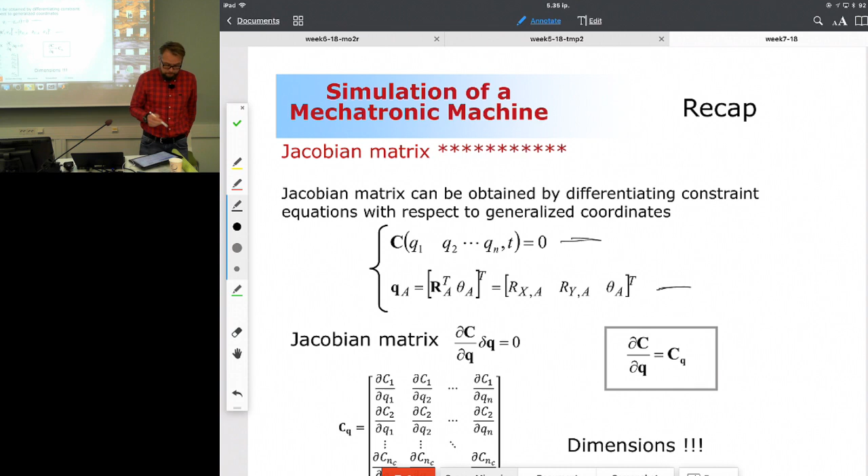Then the kinematic analysis, so we go back down to 4 stars. Now this is a little bit unfair - look, everything is rated as 4-star. The only thing not rated 4-star was velocity and acceleration. Others are very important. What are you going to do? They are very important.

Kinematic analysis consists of 3 steps. First we have to solve the position level. The position level will be an iterative process - an iterative process, that is Newton-Raphson. So we are going to get this delta Q, the Newton difference. The Newton difference is not the solution, but it tells us how we should update the generalized coordinates to get the positional level solution.

That's what it is - that's extremely important to understand, that it's an iterative process. Delta Q is not the solution, but it's a direction for how to update the generalized coordinates in order to reach the destination.

Velocity level is simply a substitution problem, and acceleration is a substitution, a little more complicated than in a velocity level, but other than that, it's very straightforward.

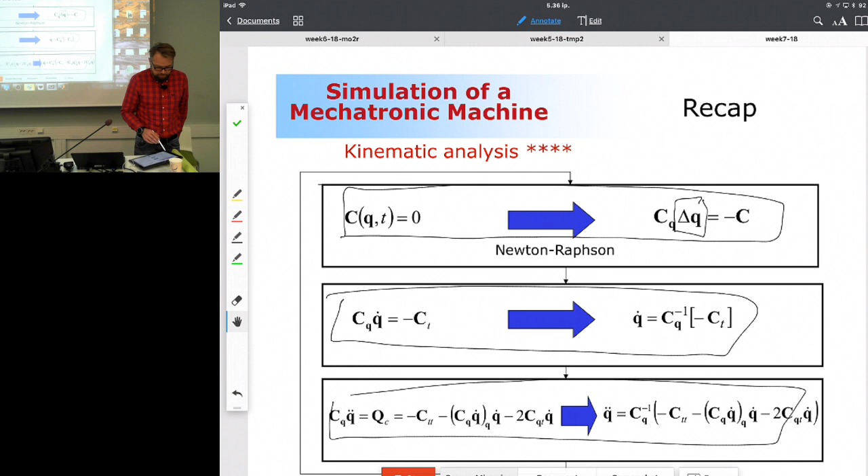Generalized forces and principle of virtual work. Principle of virtual work is a very difficult concept. This is rated 3 stars. If you can understand this relation, that delta R is equal to delta Q multiplied by the mapping matrix, that will be great. That will be the whole deal.

And why do we do this? Because we wanted to map the forces from global coordinates to generalized coordinates. Why generalized coordinates? Because the generalized coordinates are the unknowns. So those are the unknowns.

So can you see the storyline here? The plot is quite clear. Everything started from the kinematics. And by the way, that's exactly what the dynamics is about. So it's all about setting rules when you define the kinematics. And the rules are how is it that you define different particles. Once you set your rules, then you just follow everything very mechanically. You just follow the different kinds of physics laws, and that's how you're going to get the equation of motion.

But the most difficult part is the kinematics, because the kinematics you can do many different ways. But once you set your mind, then you need to be consistent. You cannot change your kinematics any longer. And the kinematics tells you everything - what are the variables, what are the things you have to express the forces, and so on and so on.

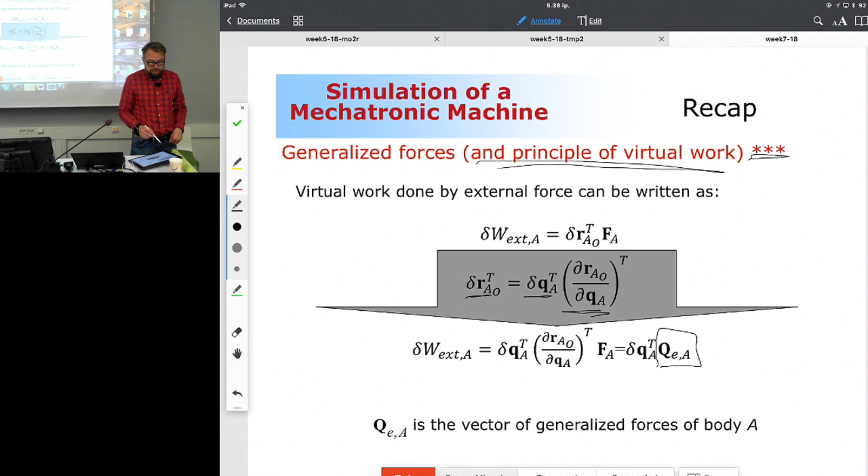Probably there might be something related to this topic as well - generalized inertial forces. I really don't know. So there could be something like, okay, something not complicated like what I have here, but details or some kind of parts related to that, like the mass matrix. How is it that you can define certain components in the mass matrix, concept of the mass matrix, questions like that.

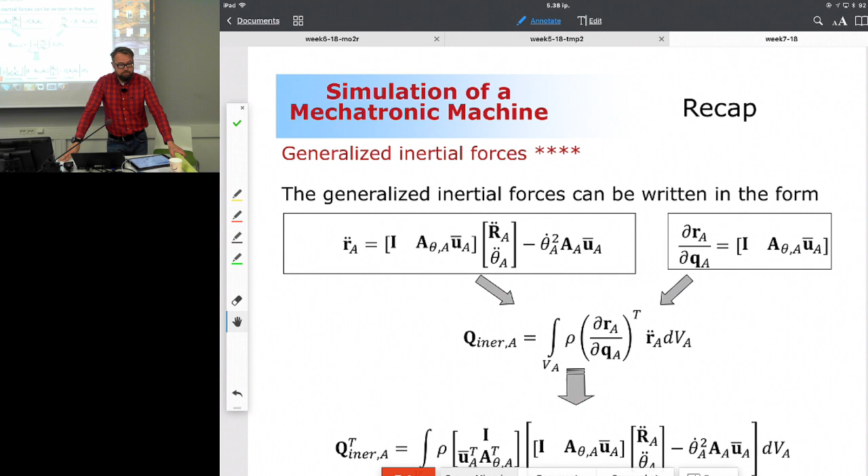Okay, so this is what we looked at earlier today. Then the mass matrix, this is a detail, so it's rated 3 stars. Oh, hold on. Here. And this is what we discussed earlier, that we even practiced this today. 3 stars, so this consists of 3 components. So this is the mass of the body, this is the mass moment of inertia, and this is a mapping between the translation and rotation, which is equal to 0 if the body reference coordinate system is located in the center of the mass.

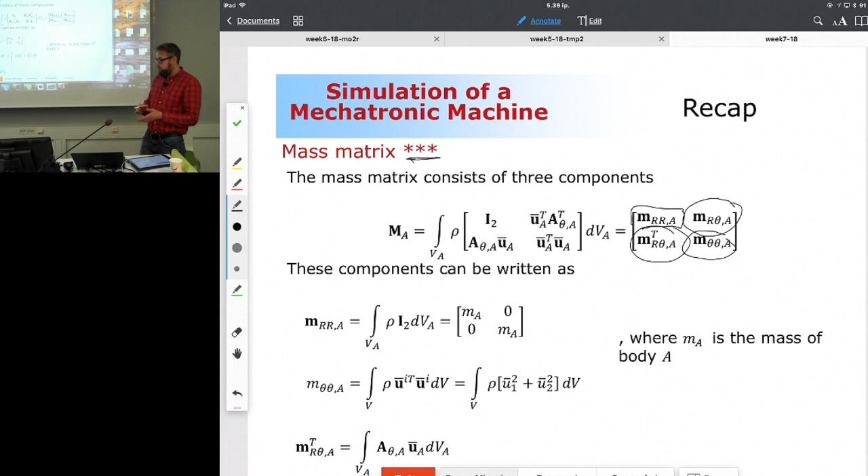Okay, quadratic velocity vector. There may be something like this, a concept question. Okay, what is the physical interpretation of the quadratic velocity vector? You have to understand this is a force that the body reference coordinate system, which is shown here, is experiencing when the body is rotating and the center of mass is not located here at the origin of the body reference coordinate system. Makes sense?

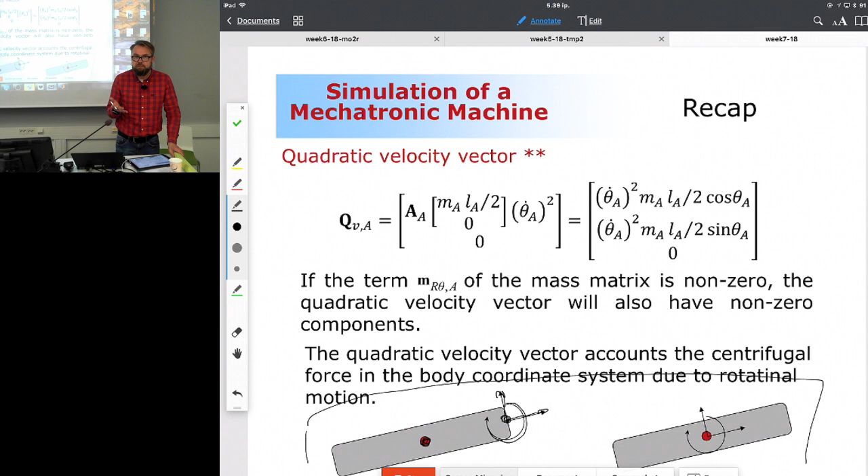Okay. Then augmented formulation - 5 stars. So it's important.

So like questions like, what are the number of unknowns? What are the unknowns? Do you think that you can answer that? Good, because we repeated that a few times today. And then this concept of moving from differential algebraic equation to ordinary differential equation - quite important too.

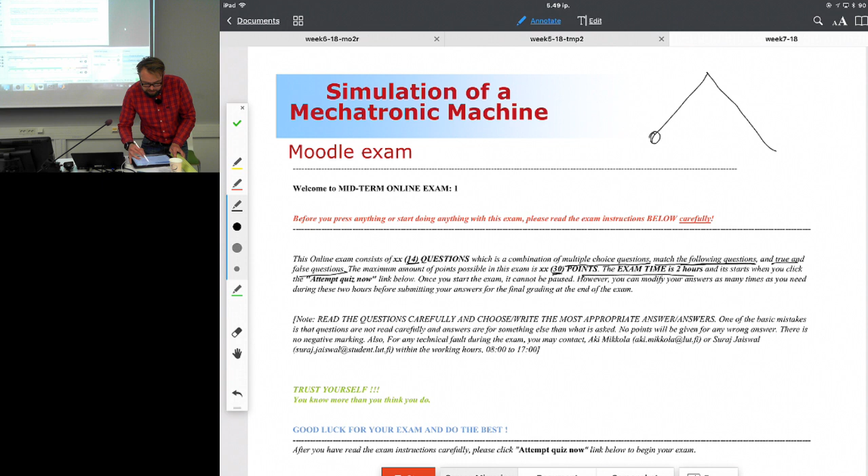There could be a system like this - I think this is a good example. There's a revolute joint and a prismatic joint here, and we ask you to compute the Jacobian matrix. Then we provide you 4 options with different dimensions and values, and you need to click the correct one. That's multiple choice. Or it could be true or false. My claim: a multi-body system is a system where bodies are connected together via springs. True or false?

So if my claim is that a multi-body system is a system where the bodies are connected together via spring elements - true or false? False.

Or I could ask: I have this system here, compute the number of degrees of freedom. Then there will be multiple choices, or you need to put in the number. So it's possible we're expecting you to put a number in a field, and there may be a certain tolerance - if your answer is within that tolerance, it's considered correct.

Okay, now my question to you is this: do you have a can-do attitude? True! Oh, my man, here's my man.